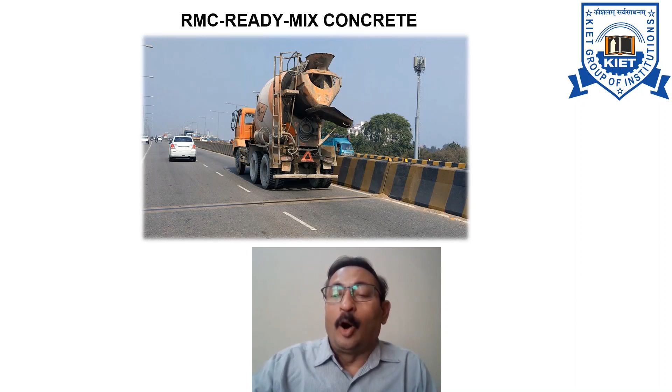Now, what is RMC, or you can say, what is ready mix concrete? It is a type of concrete which is manufactured in a factory, especially known as a batching plant, according to the given set of proportions of the ingredients. Then it is delivered to the work site by a truck which is mounted with mixers, or you can say which is mounted with an agitator. This results in precise mixes, allowing special concrete mixtures to be developed and implemented on construction sites.

If we compare ready mix concrete versus site mix concrete, then there are several parameters, several points on which we can differentiate both of them, such as consistent quality. Actually, concrete is made in high-tech batching plants using computerized technology, or you can say the concrete which is constructed in a computerized environment is known as ready mix concrete. Whereas in site mix, the quality of concrete is inconsistent because the mixing of ingredients in the concrete is done by hand, or most of the time it is hand mix. So it is a problem. The concrete is inconsistent. So to get more consistency, we have to use ready mix concrete.

In ready mix concrete, the speed of construction is faster. It is double quick time. Whereas in site mix or manual mixing, it is time consuming. In ready mix, raw materials are chosen after a strict quality check so that you can maintain the quality of concrete of international standard. Whereas in site mix, the quality of raw material is manually checked.

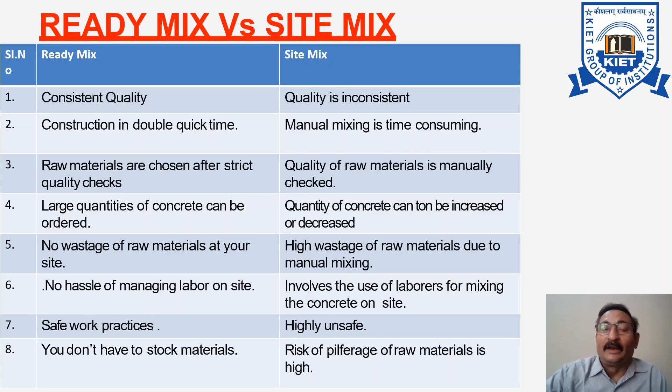In ready mix, there is no hassle because you don't have to manage the labor. The labor associated with the production of concrete can be reduced, whereas site mix involves the use of labor for mixing the concrete. In ready mix, you can use safe work practices, but site mix is highly unsafe. In ready mix, you don't need to stock the material at the site. Whereas in site mix, there is a risk. You have to store the material, and in this condition you have to make space, you have to keep a guard to take care of the material which has been stocked at the site.

Now, if we go to the history of ready-mix concrete, the idea is not very new. It was first introduced by architect Jurgen Heinrich Magens. He got his patent in Germany in 1903. After 4 years, in 1907, he discovered that the available time for transportation could be prolonged not only by cooling fresh concrete but also by agitating or vibrating it during transportation. After this finding, the first concrete mixed off-site and delivered to the construction site was done at Baltimore, in the United States, in 1913.

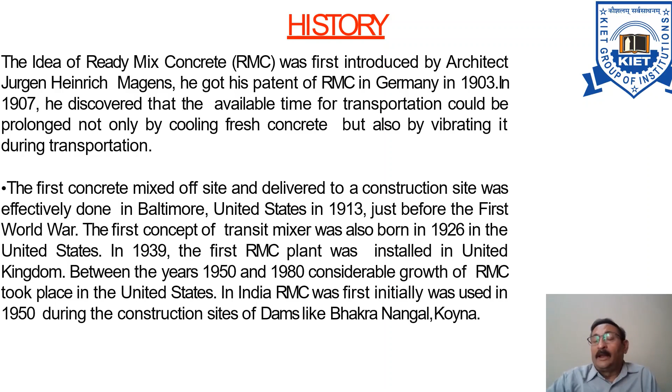The first concept of the transit mixer came into the picture in 1926. Then in 1939 or the start of 1940, the first RMC plant was installed in England. Between 1950 and 1980, considerable growth of RMC took place in the United States of America. But in India, the first RMC was installed in 1950, during the construction of dams like Bhakra Nangal and Koyna. If we discuss RMC plants in India, there are approximately 9,000 plus plants in today's world. But still, so much has to be done in this field.

Now, if we discuss the advantages of ready-mix concrete, we can say that better quality concrete is produced in lesser time, elimination of storage space, elimination of the tension of procurement or hiring of plant or machinery and taking care of that machinery. Basic material wastage can be avoided. The labor problem, which is increasing day by day, can be eliminated, for labor involved in the production of concrete. Time required is greatly reduced. If you are not using machinery or equipment at the site, then there is no noise pollution. Since concrete is made off-site, dust pollution and air pollution can be reduced at the site. And due to all this, the organization at site is more streamlined.

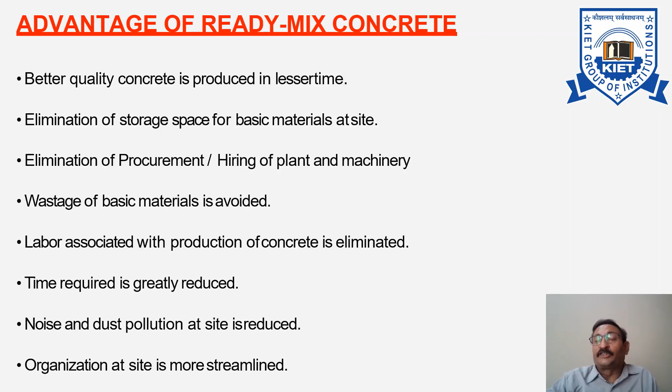But there are certain limitations. As ready-mix concrete is not available for placement immediately after the preparation of the concrete mix, there are chances that workability can be lost if you have not added any admixture. There are chances of setting of concrete mixes if the transit time involved is more, for example if the concrete mixer has been stuck in a jam. Generally, we add some admixture like plasticizers, superplasticizers or retarders.

So by addition of those retarders, you can delay the setting time, but sometimes it may cause a placement problem. Or as I had told you earlier, if you had calculated the transit time as 30 minutes and the mixer has got stuck in a jam and it has taken a long time, then the concrete will be set. It may affect the strength of concrete.

So addition of plasticizers and superplasticizers is required, but they have to be tested for their suitability in that particular concrete. In case loss of strength is observed, the characteristic strength has to be enhanced after loss of strength. Then only you can achieve the characteristic strength.

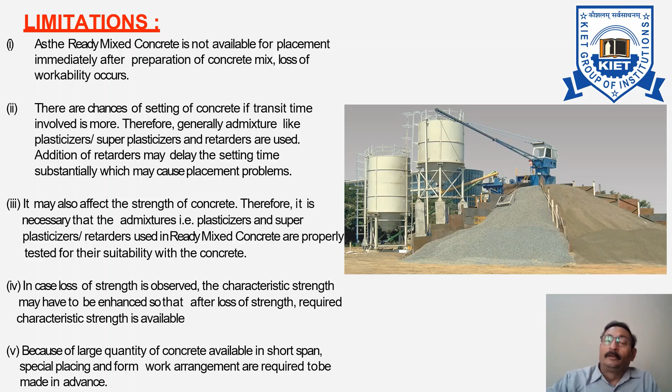Because of the large quantity of concrete available in a short span, special placing and formwork arrangements are required to be made in advance. You have to procure the formwork, additional formwork, because the concrete you are taking is in large quantity. We need some equipment, and the main equipment which we require is the transit mixer.

The purpose of producing well-mixed concrete is lost if concrete loses its strength during transportation. Therefore, an efficient transit mixer is an integral part of RMC plants. Generally, the capacity of this transit mixer is 4 cubic meters, or you can say 8,000 liters. But this quantity can be increased. The filling volumes vary from 50% to 60% of the volume of the mixer.

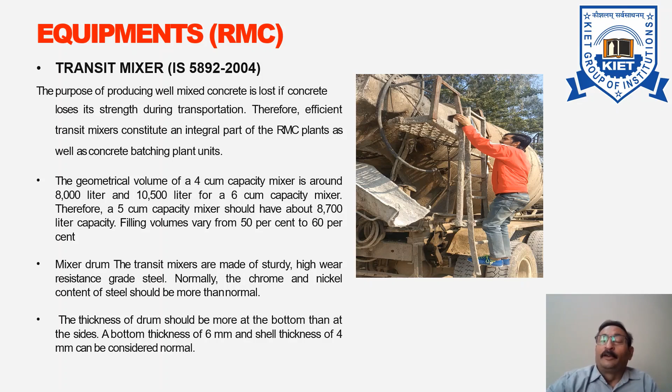The mixer drums of the transit mixer are made of high wear resistance grade steel; generally chrome plated or nickel content steel is used for making this mixer drum. The thickness of the drum should be more at the bottom than at the sides. That is why the minimum bottom thickness is 6 mm and shell thickness is 4 mm. This is an important equipment because you are taking the concrete from the plant to the site where you want to use the concrete.

Now, if you can see the operation of these RMC in the figure, the concrete is continuously agitated. These transit mixers are sometimes based at a central plant, and the concrete is completely mixed during the transit. Or sometimes the partially mixed concrete is taken in the transit mixer and the complete mixing is done during the transit.

If you use this method, then you can place the concrete immediately after the mixing. By using this method, you can avoid the problem of premature hardening, or you can say you can avoid the slump loss, which can potentially occur with delays in transportation or during placement of central mixed concrete. Additionally, transit mixing allows concrete to be hauled to construction sites further away from the plant.

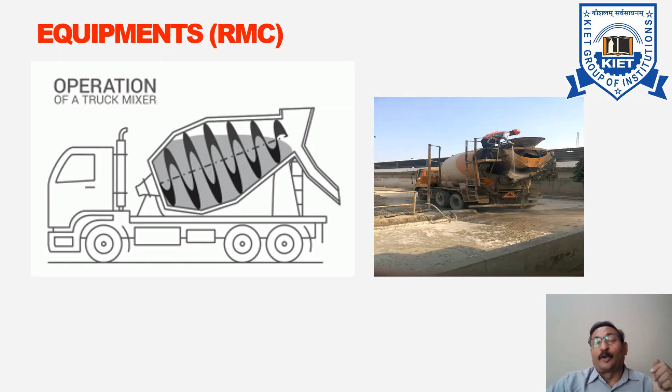Some other things, some conveyance units, which we had discussed already at the time of placement of concrete, are there, such as the skip bucket charger box. This is a large steel box. I will show you the figure in the next slide. This is a large steel box which receives the aggregate and transports it to the mixer for mixing. These boxes run on rails which can take the aggregate up to the mixing point.

Or for conveyance, you can use a conveyor belt. They are used to convey the material from bins or silos to the skip bucket, to the charger box, or to the mixer. A modified form of conveyor belt is attached with the dip bucket, which can be used to carry materials to the mixer in place of the charger box. These dip buckets consist of two protective rubber layers at the sides to prevent spillage, and the belt is partitioned to ensure correct quantities for batching.

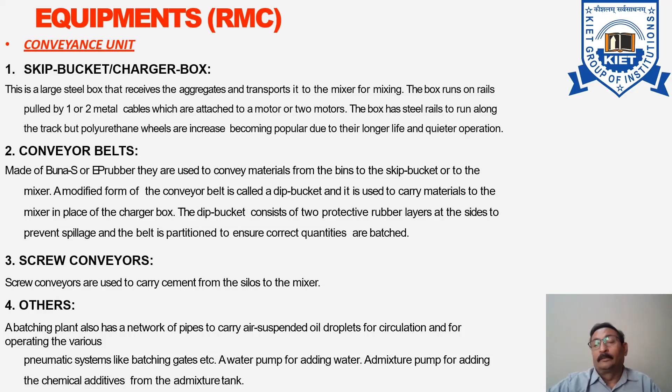You can use screw conveyors. They are only used to carry cement from silos to the mixer. Some other equipment is also required, such as a network of pipes to carry air, suspended air, to make the air circulate. You can use a pneumatic system like batching gates. You have to use a water pump for adding water, and most of the time an admixture pump for adding the chemical admixture. So these are some equipment which have to be used at the ready-mix concrete plant.

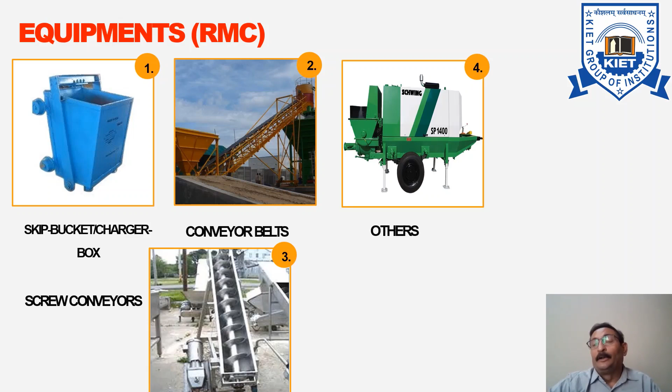Now, the first raw material which you are using is aggregate, because aggregate makes up 60 to 75% of the volume of the concrete. These aggregates are further classified as fine aggregate and coarse aggregate. Several tests have to be done when you are making it in ready-mix plants, such as for fine aggregate, we do grading test, specific gravity test, water absorption test, moisture content test, and organic impurities test.

For coarse aggregate, we again do grading test, specific gravity test, water absorption test, moisture content test, impact value, crushing value, and abrasion value test. All these tests have to be performed so that we can maintain the quality of aggregates.

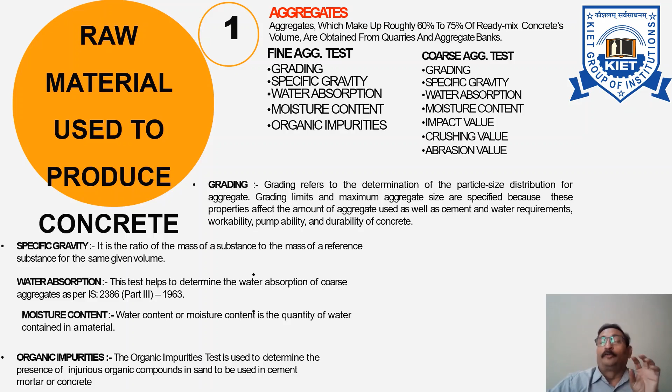The next is cement. It is one of the most important and most common construction ingredients because it has to hold the aggregate, or hold the structure together. Nowadays we are also using supplementary cementitious material so that the characteristic strength of the mix is much higher. It is used in conjunction with Portland cement to make high performance concrete, or the performance can be improved if you use high volume fly ash concrete.

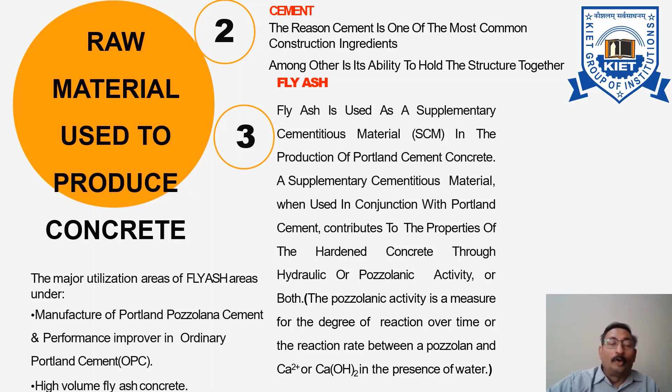The next is additives, or admixtures. They can be solid or liquid substances, added in the batching plant or in the transit mixer. Most commonly used additives can improve the durability of the concrete or reduce the water content required. It can even shorten the setting time, or sometimes increase it.

The next raw material is water. The amount of water in concrete has to be in a controlled quantity because it induces workability. It may affect the compressive strength, the permeability and water tightness, and the drying shrinkage. The potential for cracking can also be changed if you change the water ratio.

After all these ingredients, it has to be mixed in a concrete mixer, where we mix all the ingredients which we had discussed.

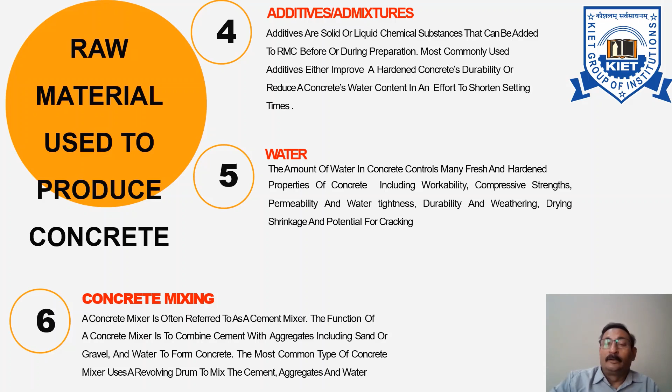When we are manufacturing concrete, step one is implementing the product received. You have to receive all the ingredients: fine aggregate, coarse aggregate, cement, and a pipeline for water. After managing the ingredients, you make a space or silos to store them, because aggregates are stored in silos, hoppers, or on the ground. Once you have stored them, it will save you several days, so it is worth storing rather than wasting time.

Step three is additives. You have to add the admixture or additives at the time of making the concrete so that it will have some fluidity, or to accelerate or delay the setting time. So you have to procure the particular additives as per your requirement. Then comes storage of cement, which has to be stored in silos or at a watertight place.

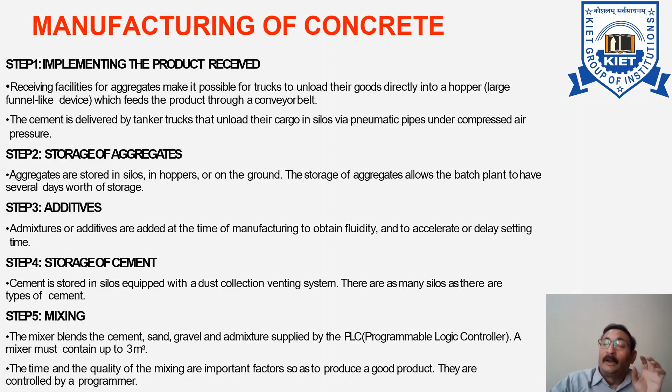After that, there is a control section, where all the controls of the full batching plant are given to the PLC, to the programmer. By using this automated control production, it allows us better selection by using rigorous standards, formulating a mix, and then with extreme precision you can take cement, sand, gravel, water and admixture with a perfect dose.

After mixing it, we can deliver either fresh concrete or partially mixed concrete to the site.

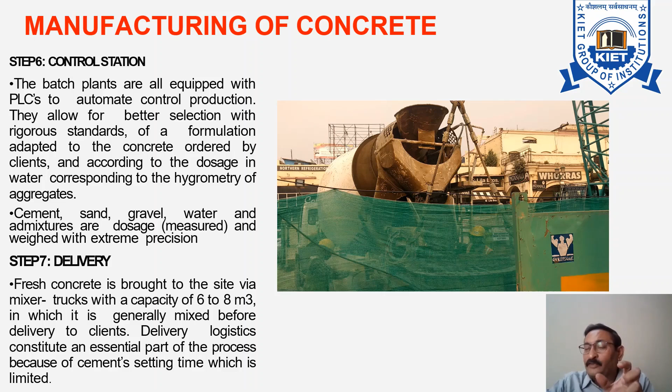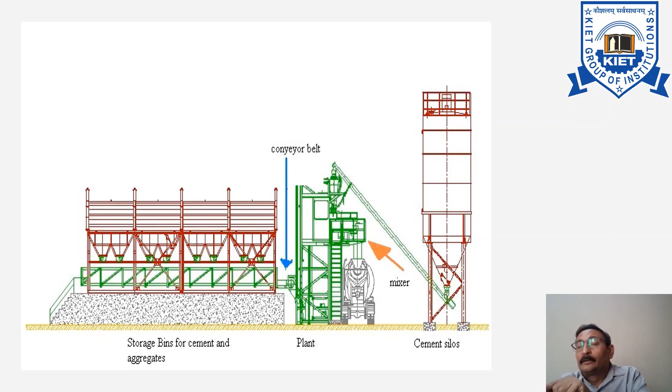Delivery logistics is also an essential part of the process because the setting time of cement is very limited. So you have to take care that the transit time is calculated in advance, and by using the silos, the mixer, the conveyor belt, and the storage bins, you have to mix the concrete and supply it so that it reaches the site before the concrete starts setting.

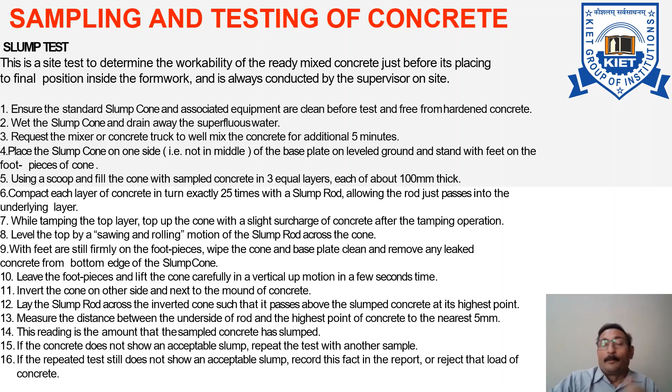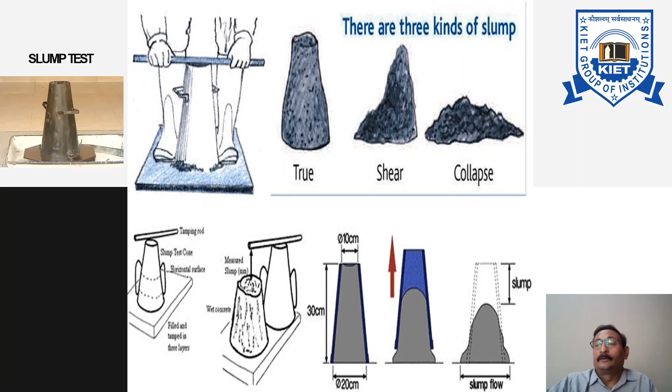For the particular batch, the concrete is tested for slump, in a way that the consistency of cement should not be changed and the slump should not be changed. To check the consistency, the workability, or the slump, we take a cone, fill the concrete in the cone, take up the cone, then according to its shape we decide what the slump is - whether it's a true slump, a shear slump, or it has collapsed. These tests help us maintain the quantity of water in the concrete, or the cement water ratio, the cement binder ratio.

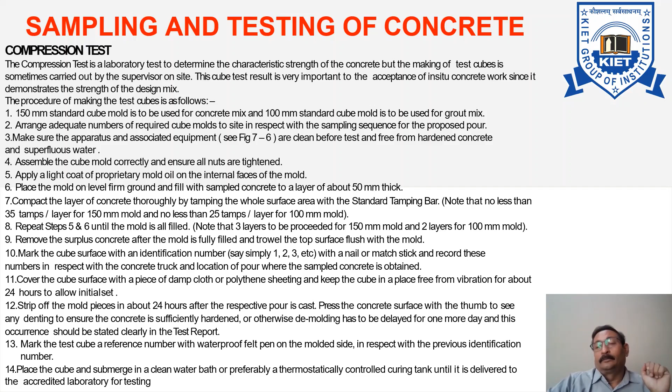To check the characteristic strength, we do a compression test. According to this test, we decide what characteristic strength we have received at the site, whether it is good or not. But I can say that the use of ready-mix concrete is very much beneficial to maintain the quality of the concrete, to get higher durability, and to go for higher characteristic strength, or higher target strength. Thank you.